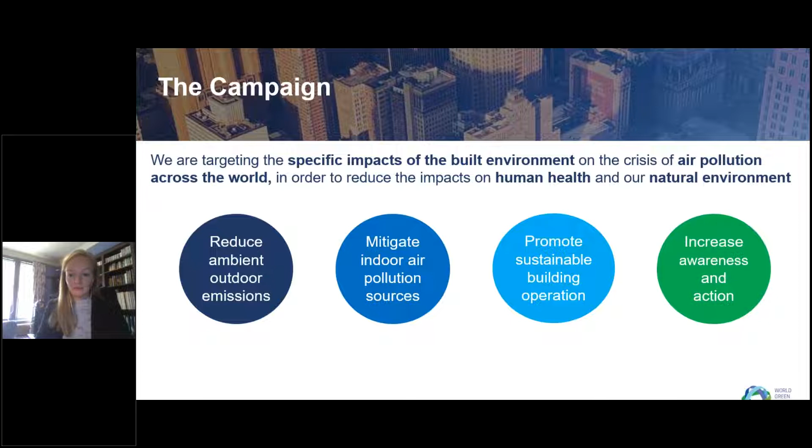To illustrate a few of these specific sources, I mentioned ambient air pollution, this outdoor air pollution, and some other factors we must be aware of, but we want to be certain we're fully emphasising the role the building and construction industry can have in causing this pollution. There's a range of different causes, ranging from energy. We know that 39% of global energy-related carbon emissions are attributed to buildings, both operationally and in embodied emissions. Construction, we know there are unfortunately pollutants being emitted at all stages of the supply chain, for example from the creation of bricks through to the pollution created on site.

And then, of course, we like to thermally control our buildings, don't we? We like them to be comfortable. Here in Scotland, we are focused very much on heating, but I assume most of you in the UAE are talking more from the cooling perspective. But particularly in the developing world, we know that heating in old-fashioned cook stoves, where we have combustion happening within people's homes, is a huge cause of black carbon emissions. And cooling as well, where we have emissions of HFCs found in air conditioning systems, are another potent climate forcer.

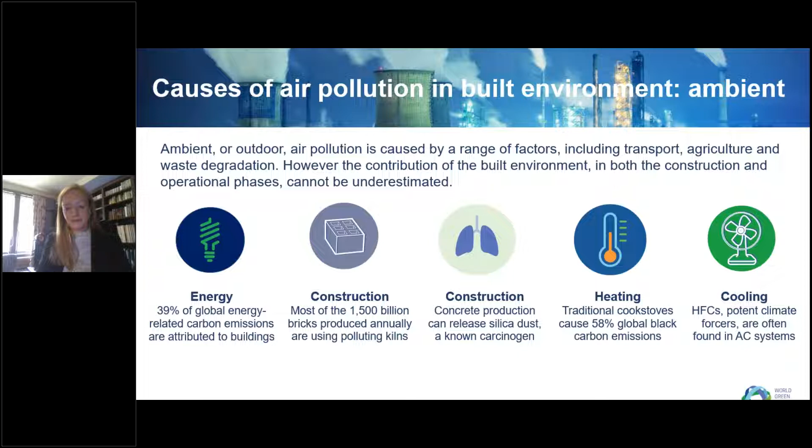On the other side of the coin, we have indoor air pollution. Again, we have heating. We know that combusting solid fuels within our houses creates indoor air pollution that can move between the indoor and outdoor environment. More specifically indoors, damp and mold can be caused by air infiltration or inefficient building fabric, and that can create airborne microbes which are very damaging to our health, particularly if you already suffer from respiratory problems. Same with chemicals.

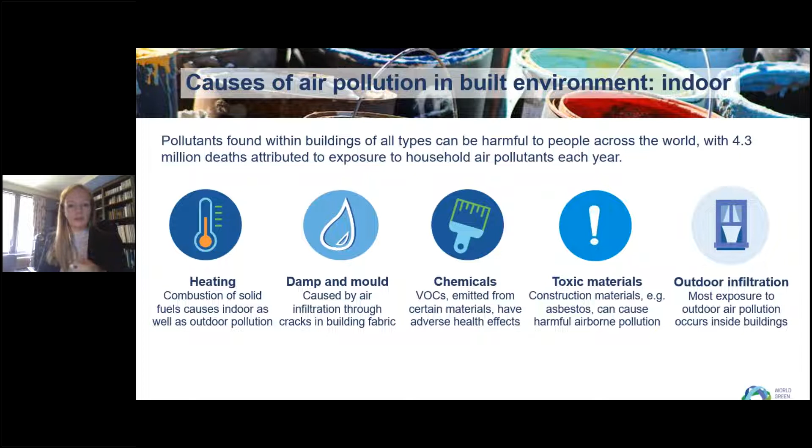I'm sure we'll talk more about VOCs, volatile organic compounds, that can be emitted or off-gassed from certain materials many of us have in our homes, schools, offices. Same with toxic materials that we're growing in awareness of, but they still remain exposed and in the active material cycle. Interestingly, outdoor infiltration into our homes or buildings is a really interesting topic of conversation, and studies have shown that actually most of our exposure to outdoor pollutants occurs when we're inside. So there really isn't this clear-cut divide between outdoor and indoor. We do sometimes have to look at them a bit more holistically.

Now, I touched on these problems, but I want to really emphasize that when we're talking about the impacts of air pollution, we want to look at it from 3 different lenses. In terms of people, air pollution is the largest environmental killer in the world, bigger than the death toll from unclean water. That is something that as we increase awareness of, we really do have the power to hopefully reduce.

In terms of planet, we know the emissions related to these pollutants have a huge impact on the enhanced greenhouse effect. That's something we want to cut down for health and for environmental reasons. And in terms of our buildings, we will look at construction, operation, and the life cycle. There are ways we can create, construct, deconstruct and operate our buildings that will be healthier for people and cut down on those planetary emissions too.

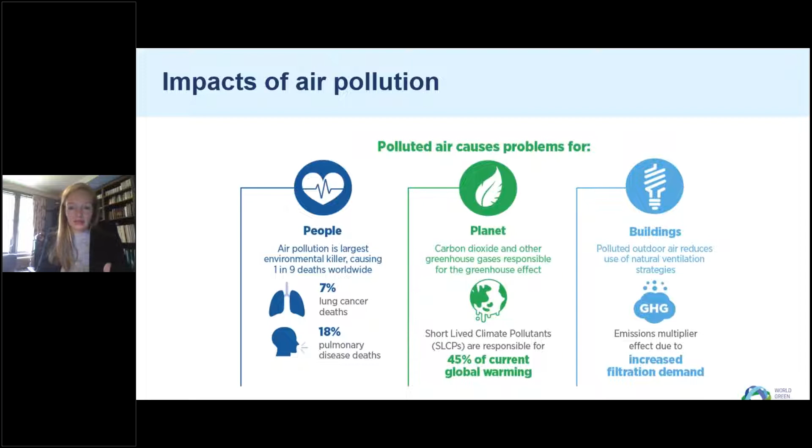So in the last couple of minutes of my introduction, I'd like to share with you what we're doing on the call to action side. And Lindsay did mention this briefly in her introduction, so thank you.

You may have heard of it already, but the background is that we recognise with air quality that the biggest challenge really is that it's partially invisible, particularly when we're looking inside buildings. Generally, we are not aware of the levels of pollutants, particularly these chemical pollutants that are inside our buildings, offices or schools.

And if we cannot measure it, then it's very, very difficult to improve it. So one of the realizations that we've had is that if we're going to tackle the contribution of the built environment, we have to be able to measure it, and we need data to be empowering those decisions that we want people to be making in their personal lives, in their organizations, and to transform government policy eventually.

So as a result, at the end of last year, the World GBC and the steering committee of GBCs around the world launched a dedicated air quality monitoring campaign called Plant a Sensor. We did this alongside a number of our partners, you'll see at the bottom. It's wonderful to be joined today by representatives from both Saint-Gobain and Siemens. Nada and Markus are both familiar with the campaign, and hopefully we can illustrate a little bit more how we're all collaborating on this.

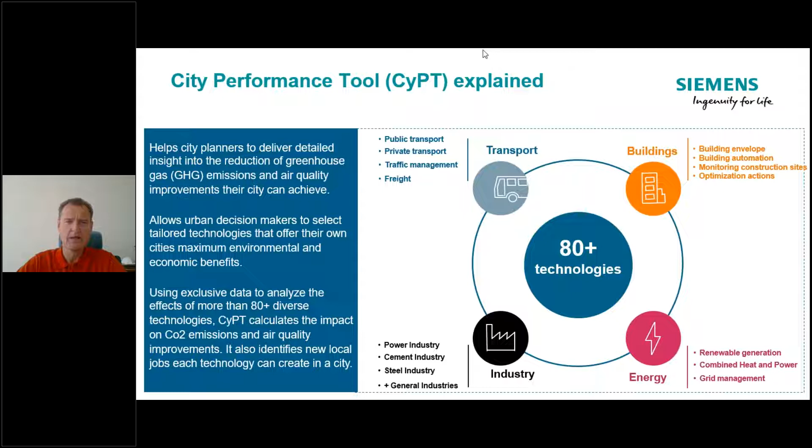So in the city performance tool, for example, I just give you, I mean, everyone and also the Emirates have targets, and that's nice, but are we just in the hand of fate? Are we just looking at our 24 hours past averages and say it was a really good year last year, or it was a good day yesterday? We actually are able to define the future by the right action.

And one action, of course, all of us could drive e-cars or hydrogen cars. But the important part is that we better manage and monitor the KPIs, that which measures are possible. Is it possible to switch from fossil fuel to solar at a certain wind direction? Yes, it is possible. Is it currently protocol? No, it is not protocol.

Do we, in the street between, in the Sheikh Zayed Road and E11 between Abu Dhabi and Dubai, do we look at wind direction and congestion and influence the toll system? No, we don't. But these are all levers and measures that we have in our hand to control the inflow of pollutants into the city. We are not only in the hand of fate.

We can roll out a future smart city by having more data, analyzing the data, and better understanding what can cause citywide pollution. It's not just happening. Construction work, wind direction - all of these factors need to be considered in deciding if work has to continue or be shifted to tomorrow, or if generation has to be migrated to a different source, because the wind and the NO2 pollution for the city is affected by wind direction. These are all actions that currently we might know a bit about, but we're not acting on it because we don't have a city performance tool and enough data to allow us actionable insights. So much said to the initiative before, which I greatly support.

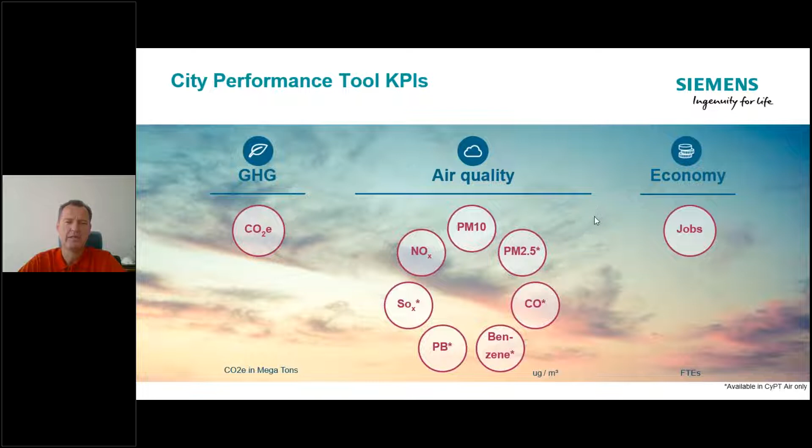So what do we monitor? Which KPIs would we monitor? We have a few cities around the world which already have started. Of course, all the air quality KPIs mentioned before by Catriona, and greenhouse gases. But we also have to look at the impact on the economy. There's a whole new dimension of jobs related to such things. We have the police to look after crimes, but who is searching and investigating pollution crimes? Who is looking after the dump truck that just dusted a whole suburb because the wind direction was into that suburb where you and me live? We do not investigate, we do not even report. We don't have a correlation between action and reaction. So that's what we try to mitigate through a city performance platform, a tool which is also accredited by several institutes. It's the right direction to go.

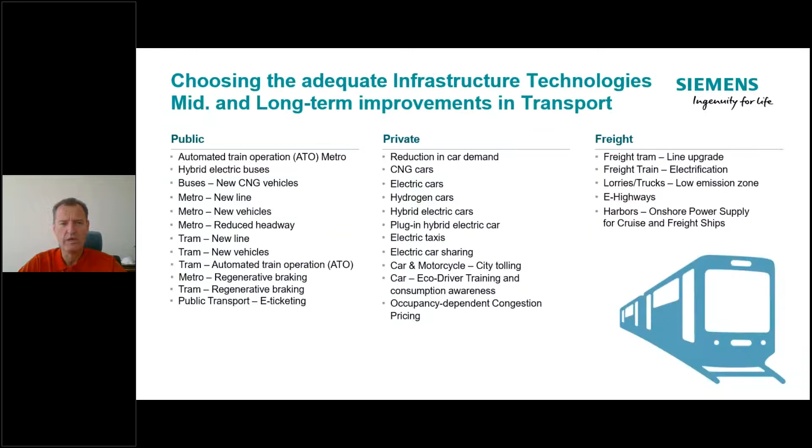And why do we want a few projects? I also show you here, around the world, some completed, some initiated, but it's far too few. And we also need to bring that to the Middle East. I know we have databases and historic data, but where we want to come to is to more or less predict the future. So here you see, you can go through the slides in detail - I have only 10 to 15 minutes maximum, sorry.

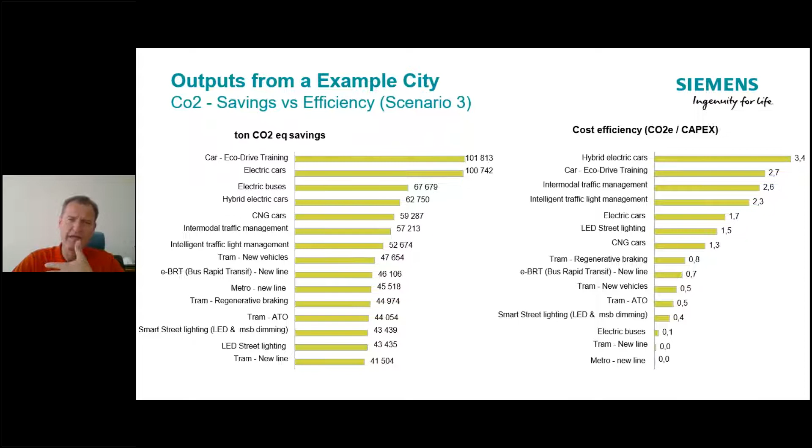Which transportation, for example, is less impactful on CO2, and what is the cost versus benefit bridge? But we need to define much more - it's not only transportation. I believe it is, let me come to that. Yeah, okay, here we go.

So on the city air management, we need to enlighten the companies and the citizens. And I emphasize companies again, because it's not only us who are in the wrong vehicle, who are not using the tram and the metro. It's also the decisions of companies - which trucks they use, what fuel they are using. Do they use hydrogen? Do they use electric trucks? What are the options they have? Because most of the traffic is not in our hand, right?

So we need to create more of a campaign, and we need to reduce the dangerous air days. And that's again not fate - these are smart decisions. So when we see correlation between weather, pressure, wind, and generation options, we can also switch to different primary power sources, primary energy sources. And that will reduce the bad air days in a managed way, not by fate.

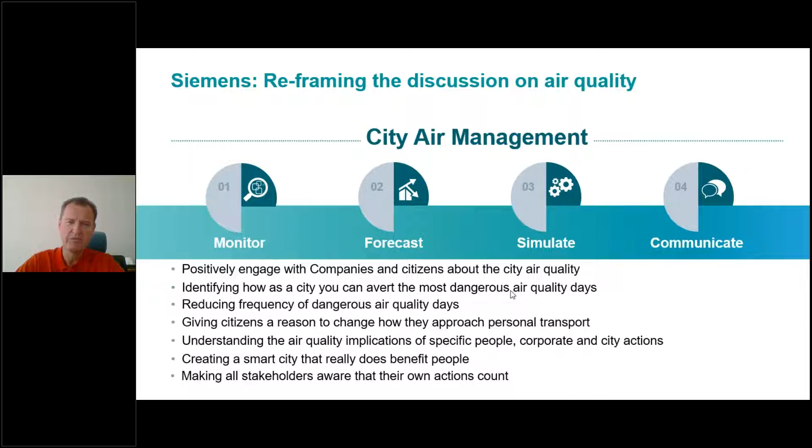So us as individuals, of course, we have the choice of our own transportation. And we need to socialize to all stakeholders - that's government, that's companies, and that's individuals - that their own action counts. And once we use artificial intelligence on top of the historic data, the forecasting data, and certain simulations, we will be pretty accurate in forecasting. Let me also jump over that slide - in forecasting what's going to happen, and this is where I wanted to get to.

It's not only in retrospect and post-mortem, where we look back at the last 24 hours and are either proud or upset about the KPIs that we have published. We need to come to a model where technology is really helping us predict the future and the forecast of air quality over the next 5 days or more. And that only works by really integrating multiple sources of data into neural networks. I believe technology is available. What is not available is the data and the cause and effect reporting.

The thing is not only that we report crimes, we have to report certain events that we see. Citizens and stakeholders need to be rewarded for reporting events that can feed a neural network and sharpen our predictive models.

It's not only that the data will tell us everything, we also need to correlate it to observations. So it will still require a completely different data supply, because it is the perception of people that needs to also feed into the artificial neural network. Only sensors don't do the trick. We need to correlate and come to a very accurate forecasting model. And that's not only the purpose, the mitigation model is the purpose.

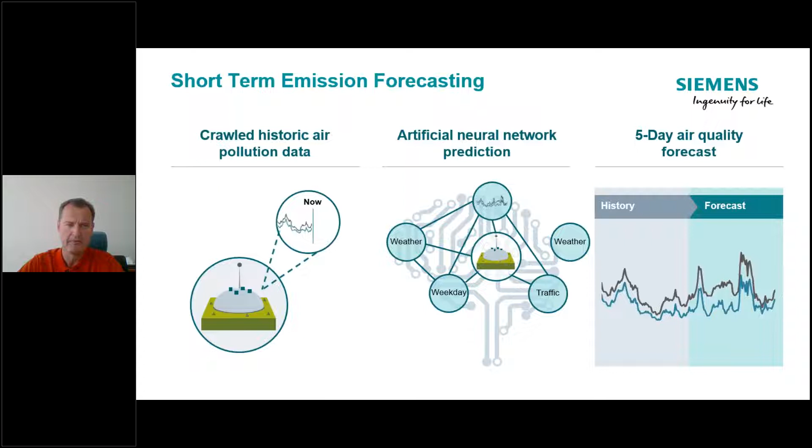I think we go over that. These are all countermeasures you have heard and seen many times. For example, in the city air management that is online in Nuremberg, lots and loads of sensors are there, but here there is one little yellow shading, and it has an NO2 alarm, and there are a few still green shaded.

But again exceeding some NO2 thresholds or PM10 and PM2.5. If we would have that around the suburbs or where we live, is it in Abu Dhabi, in Dubai, in Fujairah, or in Ras Al Khaimah, the thing is that will then allow us to map observations to it and accurate cause and effect analysis.

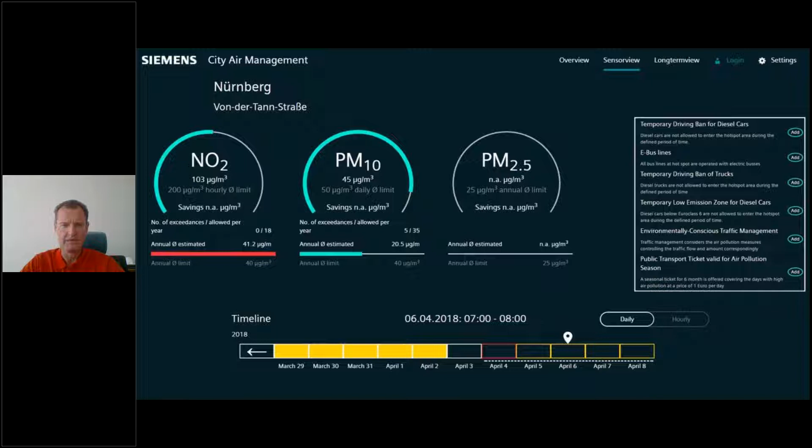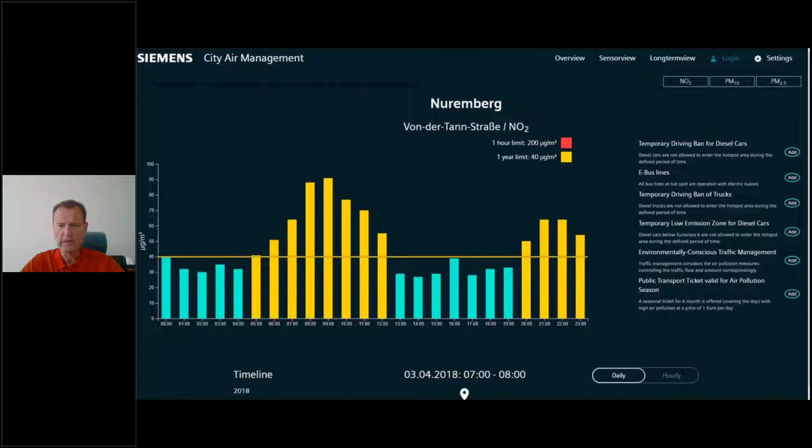And these platforms exist. I highly encourage also maybe Smart Dubai will roll further out. And the target is not to predict or to report the past. The target is to influence the future of pollution and run through models that allow us to manage it. So by dashboards, by displaying, and by having grip on actions, we will be able to shape the air quality outdoors.

Now coming to indoor solutions, we are in a time of a viral attack of unseen proportions, and there are attempts to reduce, not to reduce the outside air in building HVAC systems, but only run on outside air, which could also have a detrimental effect. So I'm not the apostle of that. We have also to reduce the VOCs in the buildings, but then there's bacteria, pathogens, viruses, and of course also mold. Simple air change doesn't do the trick anymore.

We need to have active components, and the solution that I am proposing is an ionization technology that basically, if we have fine dust, clumps up the dust through positive and negative ions. So we make the particles larger, easier to capture, falling down in the ducts or in filters, or it will also disable pathogens, viruses and bacteria over time.

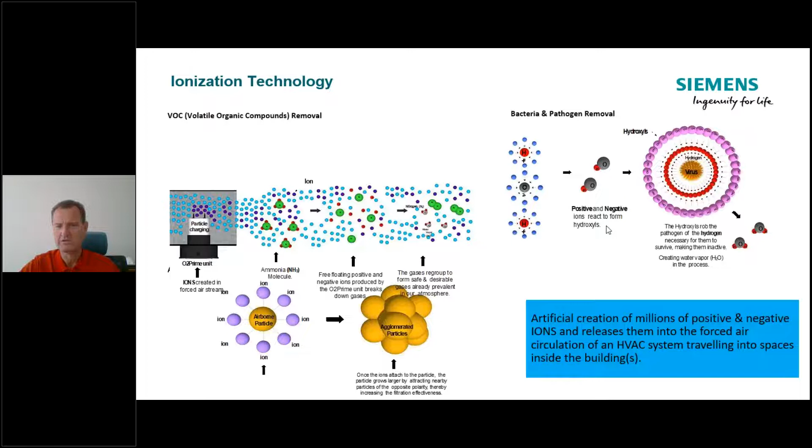Details on technology can be provided. The important thing is all of us will earlier or later go back to offices, and we have an awkward feeling. And such a solution can be retrofitted into existing HVAC systems.

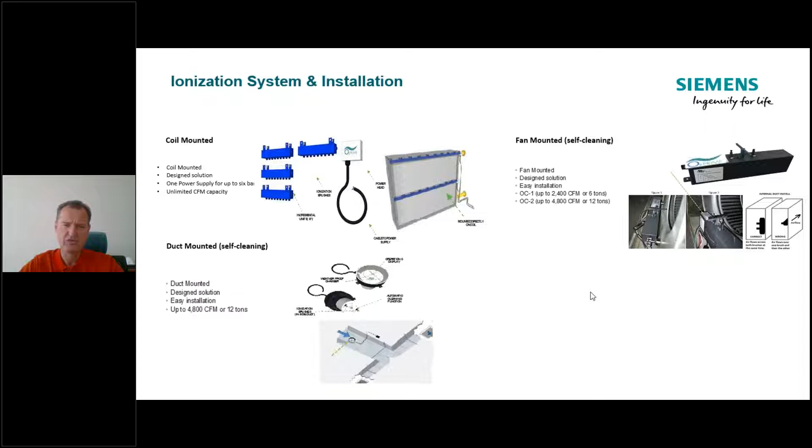You can either have it mounted on coils, you can have it mounted on ducts. Inside the ducts, it can be inserted, or it can be fan mounted, with very low energy consumption, very easy to install. And results show that this is really an effective countermeasure to the worries and feelings that we all have. There are also units that are portable.

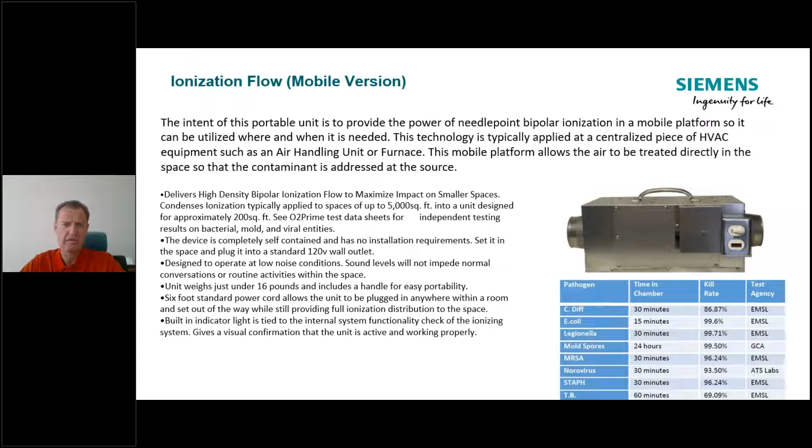Let me not go into that, this has nothing to do now with Siemens. I show you also other technologies. We have the sensors, we have the measuring devices, but currently, as we speak, I would say in our buildings, this is not integrated.

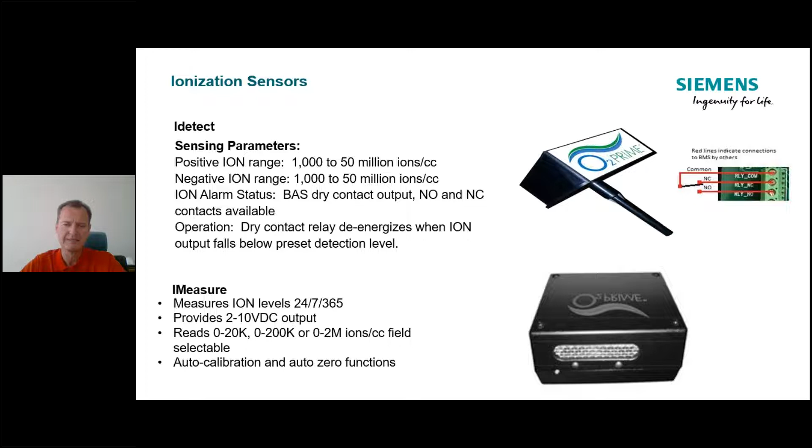We have a very good grip, and to the occupants of the buildings, the office worker, us, on our office booking platforms. For example, we use Comfy, where we book our desks and where we announce that we are going to office and where we monitor that the governmental thresholds of less than 25 and 30% of occupants are only in the building.

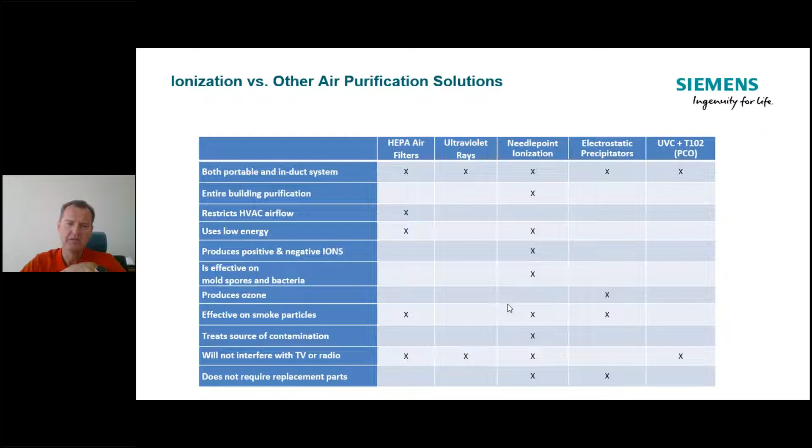Such an app on your phone can also update you about the performance of the air purification system in your building. And that will give the returning office workers a real good feeling. Of course, it will also influence their performance and their productivity. Later, when you look through the slides, you can see how these measures comply with ASHRAE standards. And I think I'm almost through.

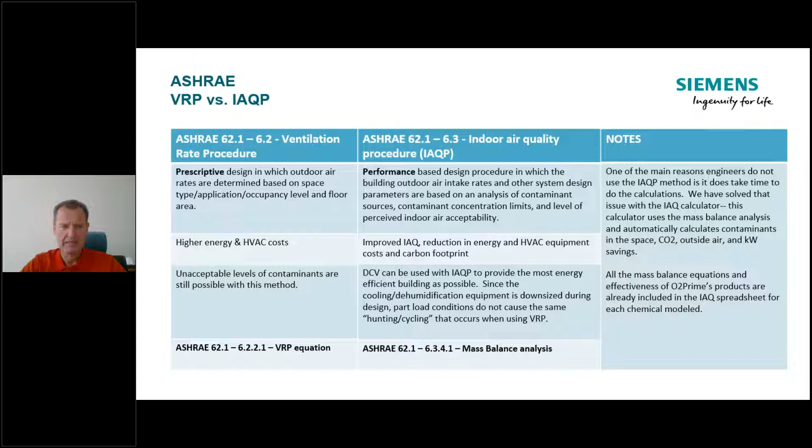One case study I like to mention - lots of you must have seen similar cases - is a daycare center that was complaining about sicknesses and coughs rotating from child to child. Once a purification system was integrated into the HVAC system, the infestation and rolling over of sicknesses reduced drastically. A final post-installation test, verified by an independent authority, confirmed that readings of pathogens and other VOCs had reached a negligible level.

Since this is not installed in commercial buildings nowadays, apart from knowing data, having data, and planting a sensor which is absolutely necessary, I'm also appealing for countermeasures. These countermeasures are, as above, a citywide system, and in any kind of HVAC system, a post-installation retrofitting of actionable things - and that would be a purification system.

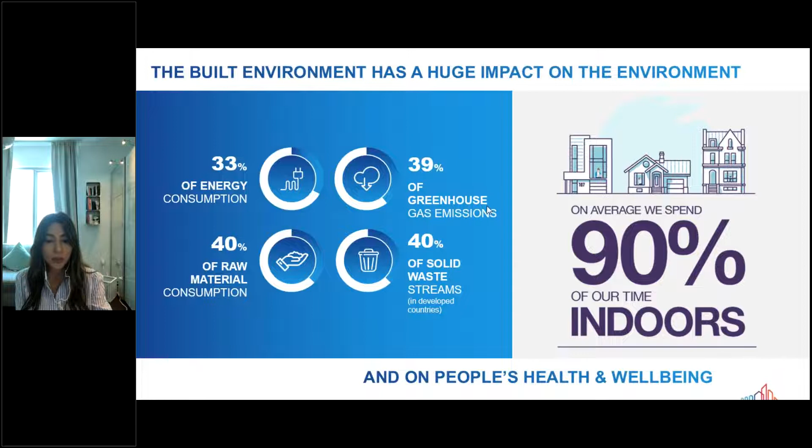Next, please. So a quick introduction about Saint-Gobain: we have been in the construction business for more than 350 years. The key to our growth is the innovative approach and sustainable mindset. Our main objective is to help the construction industry and key stakeholders create healthy and comfortable indoor environments by designing and manufacturing the right building solutions.

This is the definition of the multi-comfort design approach, which starts from the end user's perspective. Depending on the function and location of the building, and with the help of our building science team, we have created a set of criteria that needs to be fulfilled to satisfy the four sensorial comforts: the feel, the see, the breathe, and the hear. But also to fulfill low energy demand, low carbon footprint, life cycle assessment, and other requirements and regulations that our solutions impact both directly and indirectly.

Following this approach, we started to get involved in different projects all around the world. The idea is to have ordinary buildings reach optimum comfort and performance level in a sustainable and cost-efficient way. You can find all of our 30 projects on our website, multicomfort.com.

Our focus today will be one of the most important key parameters: indoor air quality. We cannot live without air, but it's also the most difficult parameter to feel and assess without measurements. It's very easy to say it's loud or hot in here, but it's difficult to say this place has bad indoor air quality unless it's really smelly and stuffy.

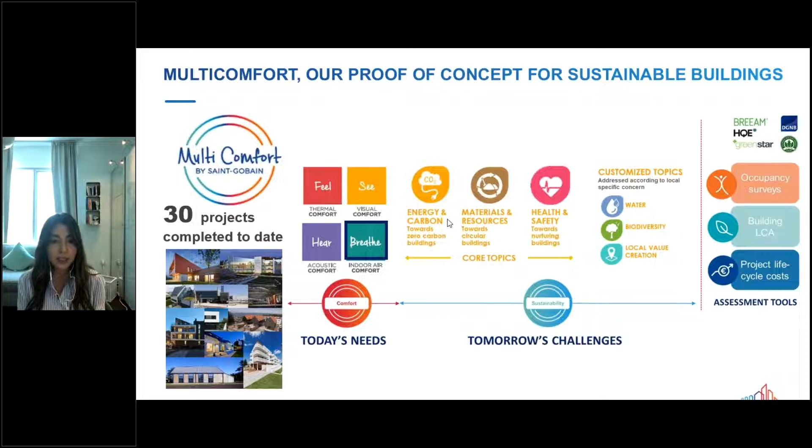Next, please. In terms of outdoor pollutants, and I think Katrina and Marcus have covered most of them, some sources are naturally occurring, such as particulate matter. Others are produced by the transportation sector, construction sites, and energy generation. In UAE in particular, we can see that particulate matter concentration due to sandstorms and dust is very high, and we also have higher levels of ozone due to the construction pace in the region and the continuous use of cooling systems, the HVAC, everywhere. Next, please.

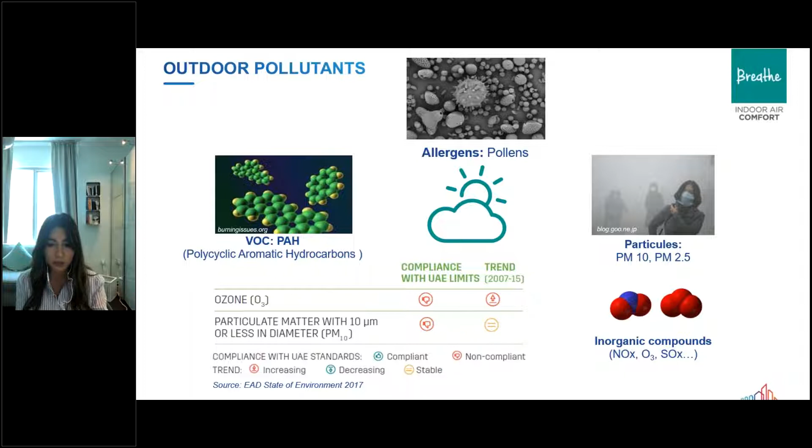So in terms of indoor pollutants, we can have different nature and origin. We have three main different types: particulates, which could be dust, dander coming from animals, and pollen.

We have also microbials, so living organisms, bacteria, viruses, and mold. And we have gases, so mainly the chemical pollutants, known as VOCs. They are emitted from the building itself, the construction material used, the furniture, the cleaning, and the cooking emissions.

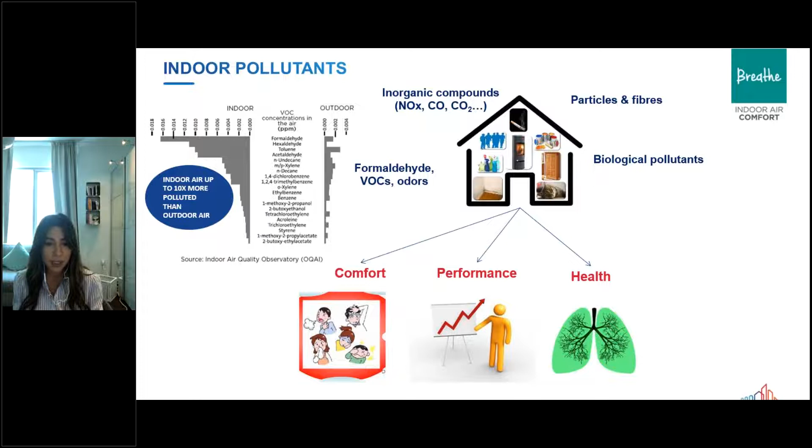Unlike we might think, indoor pollution is much higher than outdoor pollution because of two main factors: the exposure time and the concentration level of some of the pollutants, such as VOCs, for instance. These pollutants are known to have a short-term comfort effect, an impact on performance and productivity, and also a long-term health effect that we call sick building syndrome. And of course, you all know the symptoms related to that.

high emitting VOC elements. We need to have proper ventilation, so a well-designed and operational HVAC system with, of course, a maintenance protocol on the air tightness and filter efficiency. And also air cleaning, which Marcus also discussed. Filtering the air is very important, using air cleaning technology, active building elements capturing the VOC from the environment, and also very simple measures like air purifying plants, for example.

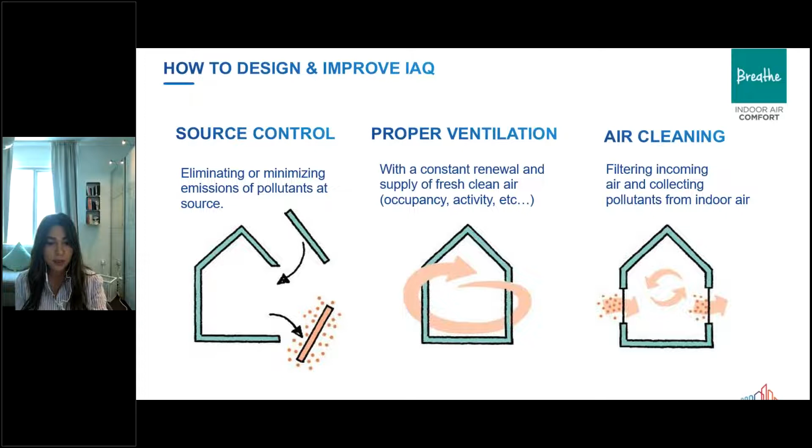So how to choose the right products? With today's rising awareness, people are starting to have the right choices in terms of product selection, whether at the stage of building design or also when doing renovation work. So local regulation, product certification, and labeling schemes are very important and helpful to filter the right construction materials. In Saint-Gobain, we have a wide range of low-emitting VOC products.

And also other building materials such as adhesives and coatings, complying to Dubai municipality, for example, low emitting product conformity. So we have the right tools and testing in the market. We just have to create awareness so that people make an informed decision on what to choose, and have a more stringent control also on site to verify that the specified materials are the ones used at the construction stage.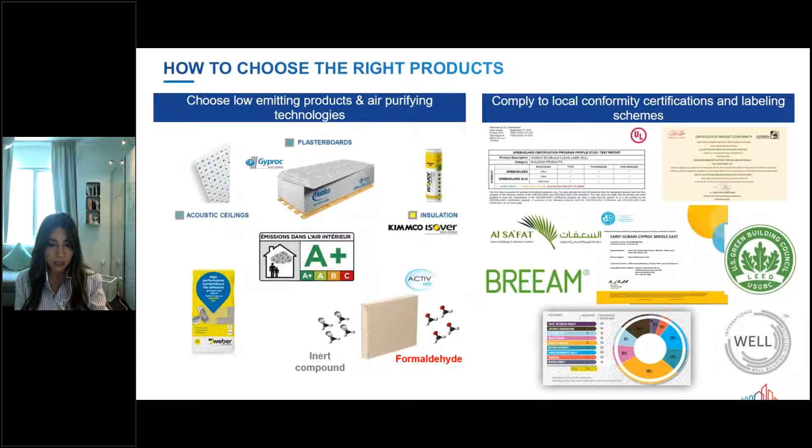So how to measure indoor air quality? This is very important. We have developed a wide expertise in Saint-Gobain around the measurement of indoor air quality. We have a laboratory mainly used to evaluate and monitor our products and latest innovations.

For example, we have emission and depollution tests. It could be done at the sample product level, but also at the full wall level. We can also measure the impact on indoor air quality at the level of a large-scale chamber. We have also been involved in many projects worldwide with measurement on site, where air sampling cartridges are collected and then analyzed in the lab.

There are two types of measurement that can be done when it comes to pollutants. We have the standardized approach, using air sampling cartridges removed from the air and then analyzed in the lab. This method allows identifying and quantifying the pollutants that exist in the air. It's a very reliable approach, but it's expensive and requires also a certain level of expertise.

The other approach we can call continuous measurement, where we can measure total VOC (TVOC), CO2, temperature, relative humidity. These are usually measured, but also sometimes carbon monoxide or PM. So it can be an indicator of the trend, but does not give accurate values. And for the total VOC, we cannot identify the exact pollutant and their individual concentration in the air.

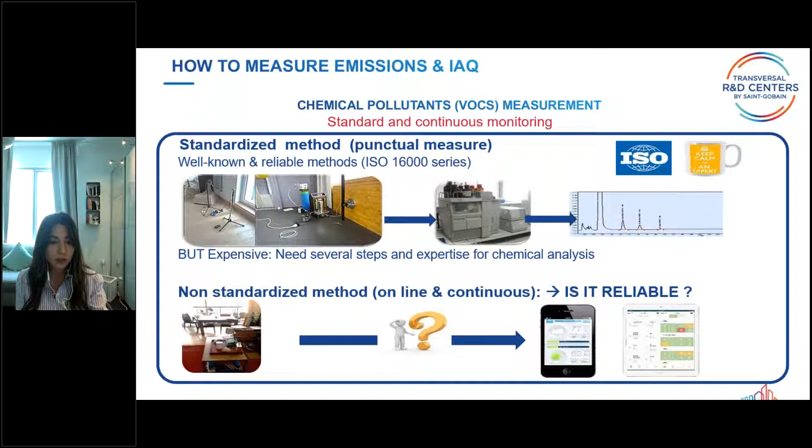So have continuous monitoring with also some air sampling done in parallel.

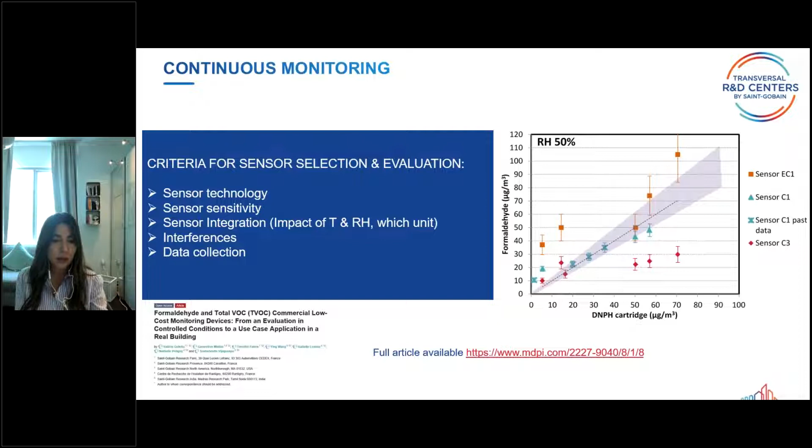Moving on to the second part of the presentation, Saint-Gobain has been very active working alongside World Green Building Council. As Katrina mentioned, we are a global sponsor for Better Places for People, and we've also been part of the Plant a Sensor campaign to give expertise on sensoring and monitoring tools.

One of World Green Building Council's focus areas is green schools. You can check their website for interesting data showing the impact of the indoor environment on the health, well-being, and learning of students. It's not only indoor air quality, but also acoustics, daylighting, and thermal comfort that are evaluated.

This initiative has been adopted locally by EGBC, Emirates Green Building Council, and we decided to partner with them on this project called Emirates Coalition for Green Schools.

It started with a roundtable last year and the publication of a white paper that you can access on the EGBC website. The objective of this initiative is to bring together the UAE's strongest advocates for green schools, create a national platform for the expansion of green schools, and ensure that every child is learning in a comfortable and healthy environment.

Another important question we want to answer through the study is the current indoor air quality issue in UAE schools. What is the relationship between indoor air quality, building design, and the impact on health, comfort, and productivity? Also, what are the local policies, and how can we explore efficient ways for control and maintenance? And what can we do to raise maximum public awareness and knowledge on this topic?

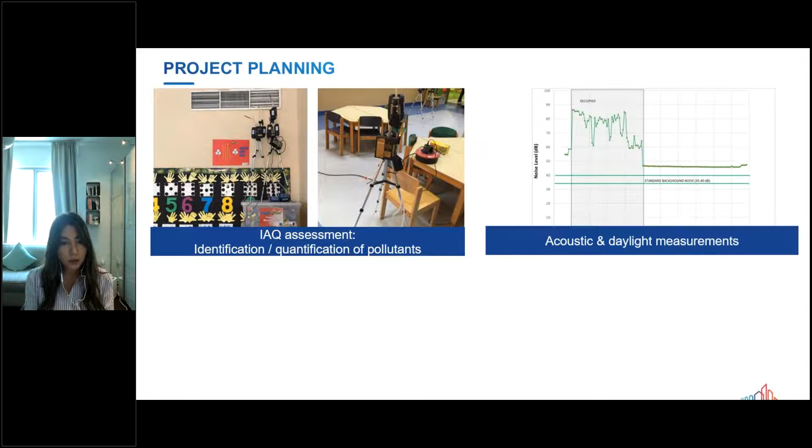So in terms of project planning, we are currently analyzing the data for indoor air quality assessment. The objective, of course, is to identify and quantify the pollutants. We've also done light and acoustic measurements because they're also very important and impact a lot the comfort in the room. So the results of the study will be published in an industry paper available to the public.

And of course, it will be shared with the UAE schools and government stakeholders during the launch event this year. We will keep everyone posted on the date, and we cannot wait to share with everybody the interesting conclusions we were able to collect.

One of the key actions we are looking forward to is raising awareness and creating knowledge around the topic, whether it is the importance of indoor air quality, involving and engaging key stakeholders in the educational sector, or how to improve indoor air quality. So what are the basic measures we need to take, or in some cases maybe do basic or deep retrofitting to improve the indoor environment.

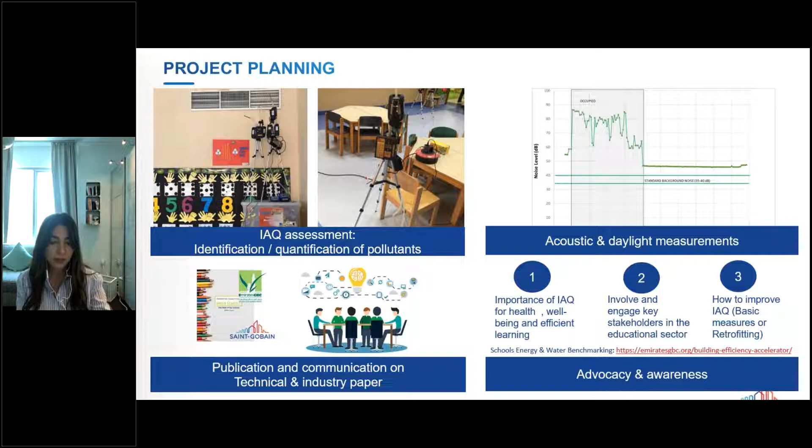So to conclude, I think after this crisis, we are all more aware of the importance of health and well-being, and it's something we need to focus on collectively to build prosperous and sustainable cities. Thank you.